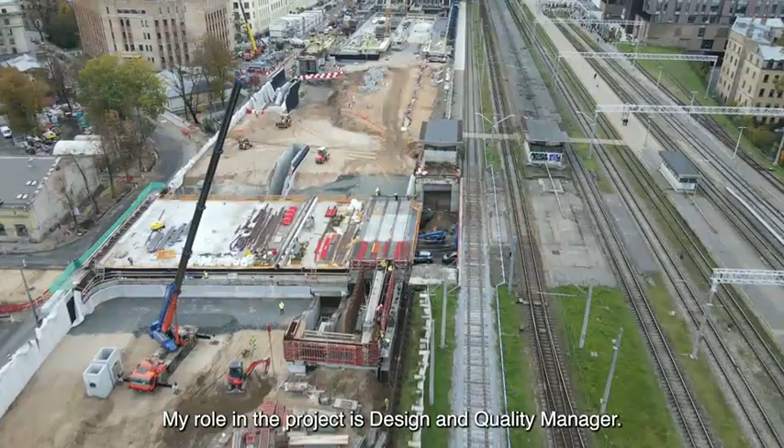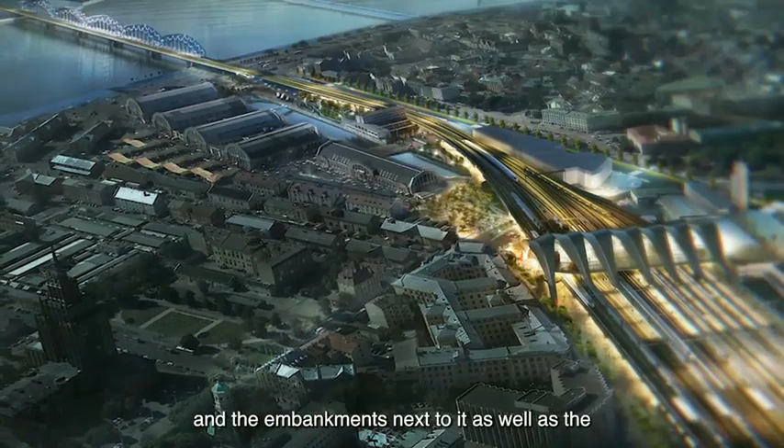I joined the Rail Baltica project as part of the team that won the competitive tender for the design and build for the Riga Central Station project. And now we are designing and building for the last few years the central station in Riga. My role in the project is design and quality manager, so I was in charge of getting the design fully completed, coordinated and approved for the Riga Central Station and the embankments next to it, as well as the bridge over Daugava River. And now I'm in charge of quality control and compliance with the design during the construction period.

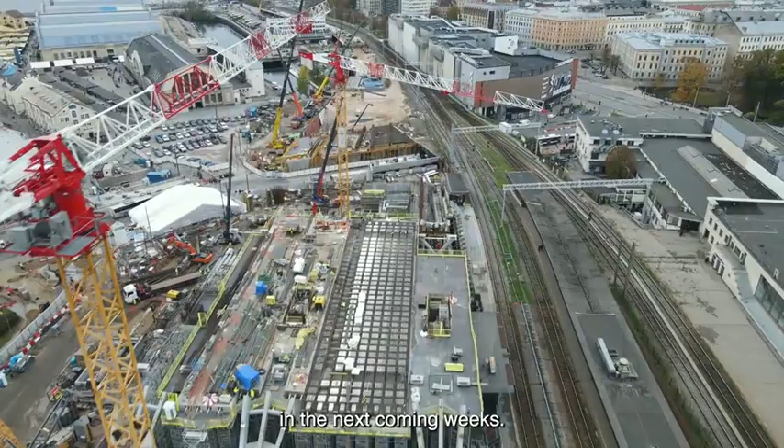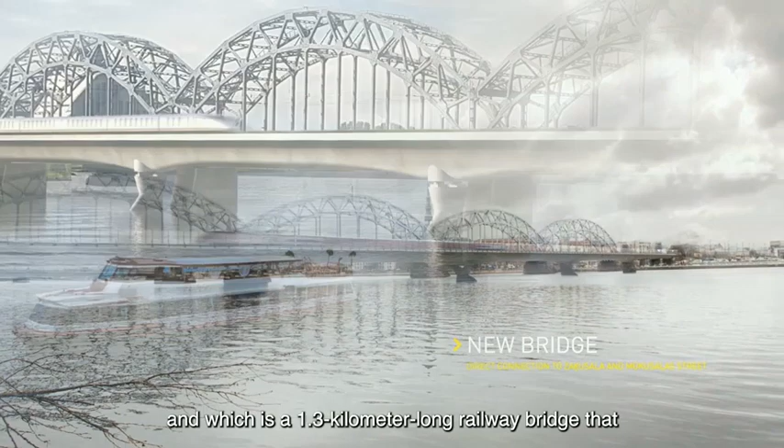For the construction, you can see currently behind me the installation of the feet of the arch of the station, which will be the support structure for the roof and the highest point of the station that will be built in the next coming weeks. So we are starting a new construction phase in the project because we are starting the construction of the bridge over the Daugava River, which is the river going through Riga, and which is a 1.3 kilometer long railway bridge that will be used for Rail Baltica operation.

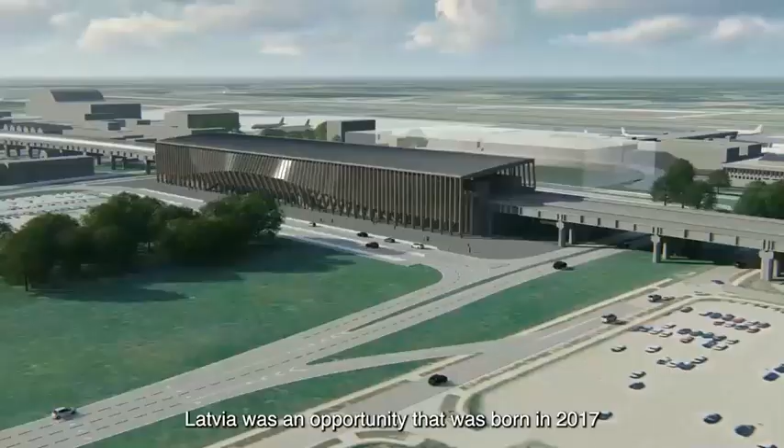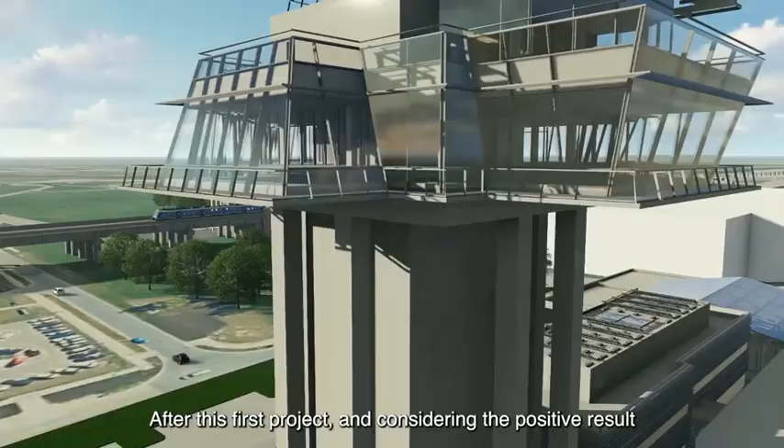I'm Chief of Syntagma Foreign Project Office, and I'm the branch manager of our activities here in Latvia. Latvia was an opportunity that was born in 2017 when our partners in the joint venture invited us into the Rail Baltica railway station at Riga Airport tender. After this first project and considering the positive result of it, we decided to remain and invest again in Latvia. We are now leading company in two other projects here.

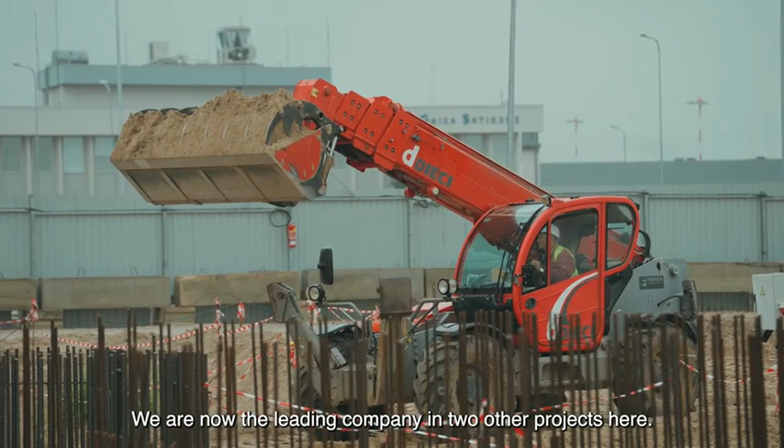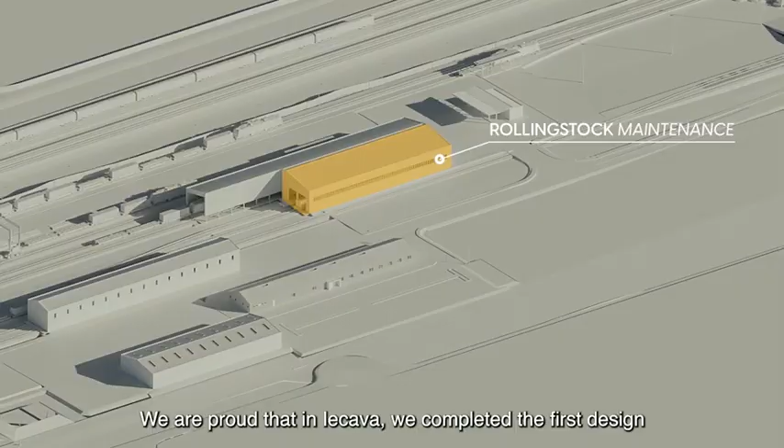The new Rail Baltica intermodal freight terminal in Salaspils and the new infrastructure maintenance facility in Skulte and in Jēkabpils. We are proud that in Iecava we completed the first design, allowing our client to start the first Rail Baltica main line works outside the Riga city.

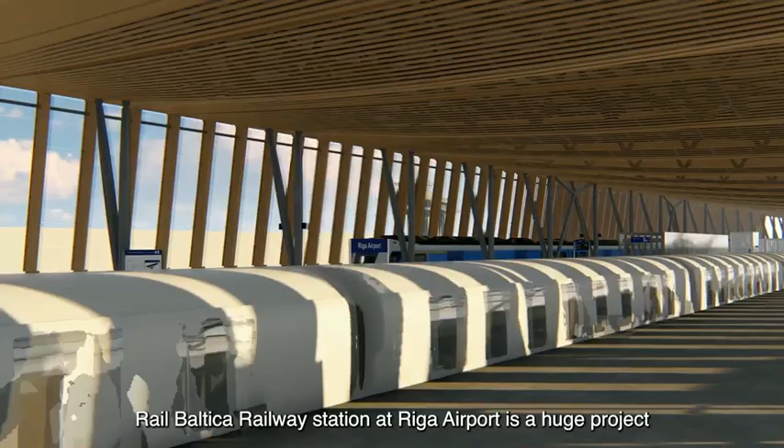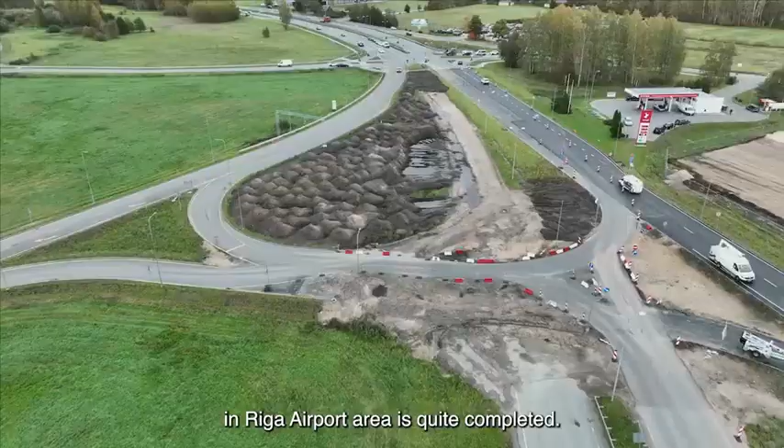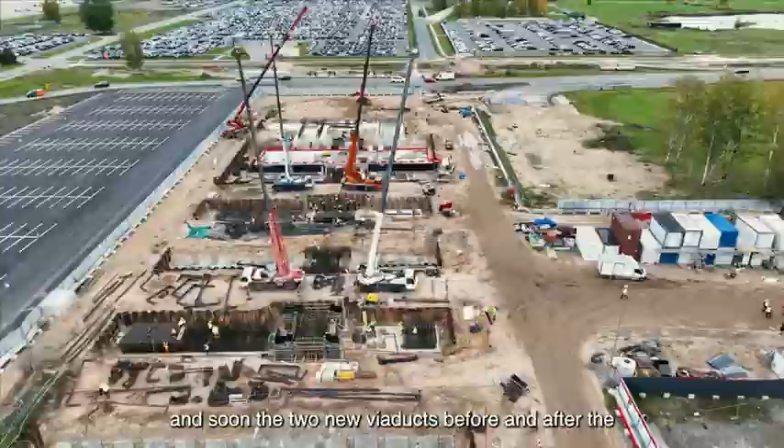Rail Baltica railway station at Riga Airport is a huge project, divided into several stages. At this moment, one of the hardest ones, the relocation of several utility networks and roads here in the Riga Airport area, is quite completed. Also, the foundation piles and pile caps are already done, and soon the two new viaducts before and after the railway station will be realized, allowing the project to be another step closer to completion.

Hello, my name is Gusts Ašmanis. I'm Director of Infrastructure Management Department at Eiropas dzelzceļa līnijas, or as we locally call ourselves, EDZL. We are national implementing body of Rail Baltica project in Latvia, and we are also interim infrastructure manager of Rail Baltica railway section in Latvia.

Today, I will inform you about our activities on which we are focusing and how we are progressing on those activities. Therefore, let me start with a map. It will give an overview of infrastructure we are developing. We are in the middle of Baltics, and that explains that it's also middle section of Rail Baltica railway line. And in this section, we are developing main line of the railway, in this case, railway tracks, as other components like electrification and signaling will be developed by joint venture RB Rail.

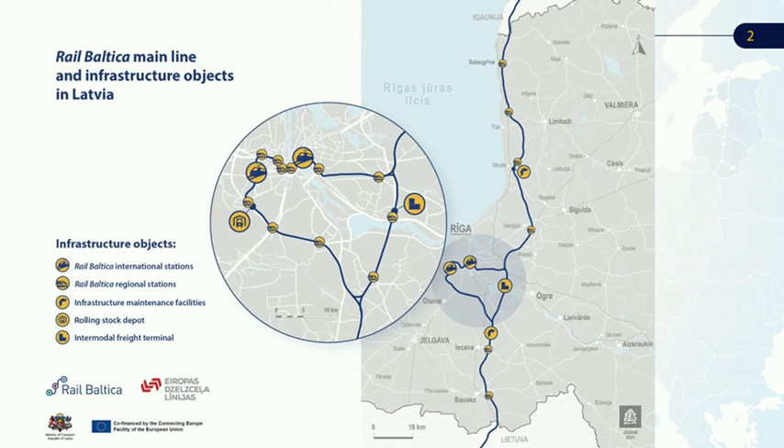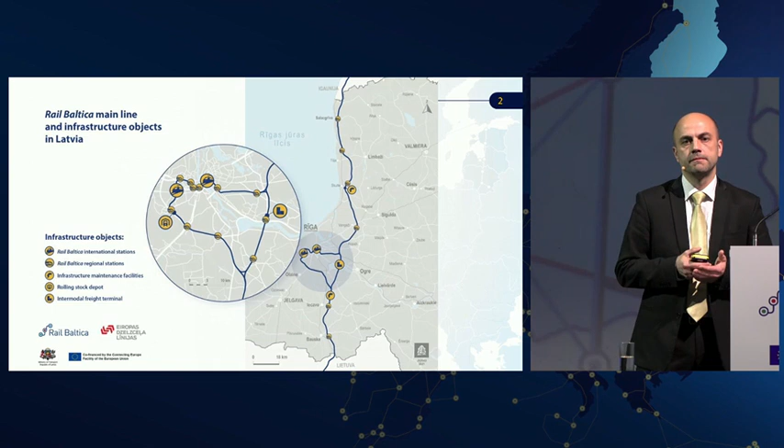And we also develop local facilities like passenger stations, both international and regional stations, freight terminals, infrastructure maintenance facilities, rolling stock depot, and also operational control center. And let me give super brief overview about our progress in those activities. This slide says itself that we are progressing very well in all activities. Of course, we are in different stages in each of them.

The most further development and progress is in our activities regarding stations. International stations are in construction phase, and this is obviously because we started this activity much earlier than other activities due to their complexity. But actually, other activities are also gaining speed and progressing very well. We are on design stage in many of those activities, starting from regional stations, followed by freight terminals and others, like infrastructure maintenance facilities. And few activities are in our pipeline.

We hope we will be able to announce soon procurement regarding those works, like development of rolling stock maintenance depot and design for it, like design for cargo terminal near to Riga International Airport. In addition, as I said, we are responsible for infrastructure management functions until the final infrastructure manager will be appointed. Therefore, what we are doing right now, we develop infrastructure management model and also work together with our colleagues in Baltics and with joint venture RB Rail in order to prepare a readiness plan for infrastructure management functions.

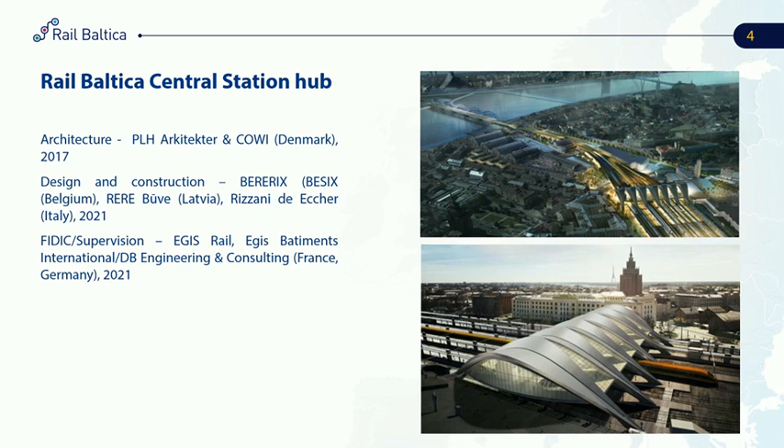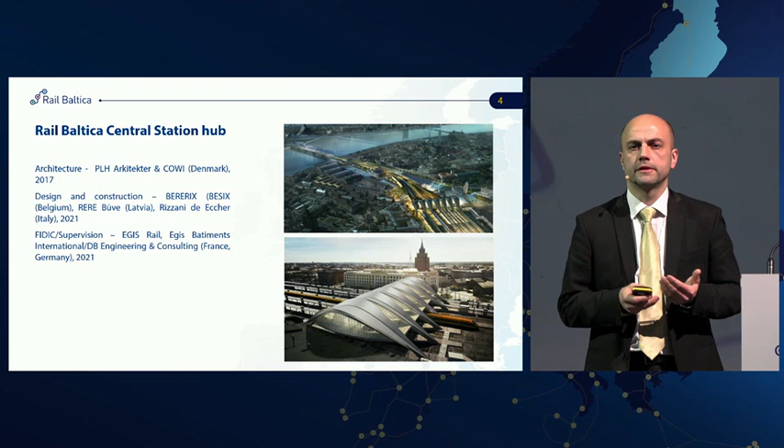development of infrastructure. In this activity, we work together with many international partners from different countries, starting from design and followed by construction works and supervision of construction, and this is also involvement of our local partners. Therefore, it is important synergy between partners from different countries. In addition, I have to mention the importance of Riga Central Station for the industry, for the transport industry.

This project is brownfield. It means that the station is there, is operating, and we are developing additional infrastructure and we will reconstruct some existing infrastructure elements. But what we will bring with Rail Baltica is additional passengers, and we are not developing only European standard gauge and connection to Europe through that. We are developing new connectivity with regional bus, as a bus terminal also will be located there.

That means that Riga Central Station in the future will definitely be the biggest passenger hub in the Baltic states. We still discuss with colleagues what could be the number of passengers, and it depends how we will be able to use the capacity. If we use maximum capacity, then we can achieve more than 40 million passengers per year in this station.

It means a huge number and significance, and it's also a significant connectivity point for the whole region and for the local community, because new connections will be available by train, new connections will be available by bus, and this will be a significant improvement from the existing situation. Therefore, it is a super important activity for us, for the whole project and for the transport industry.

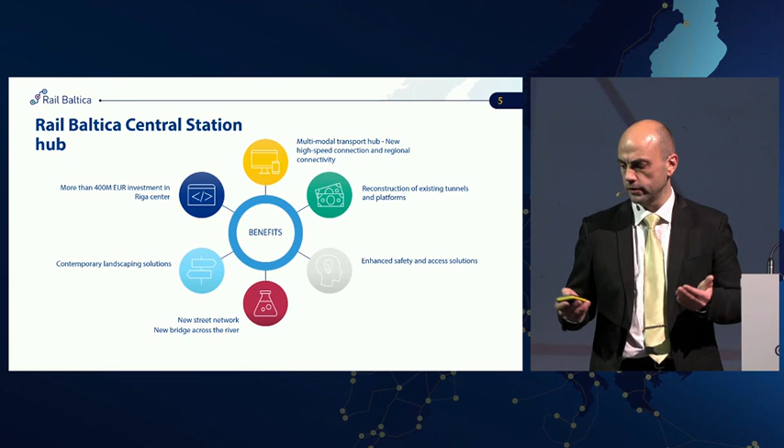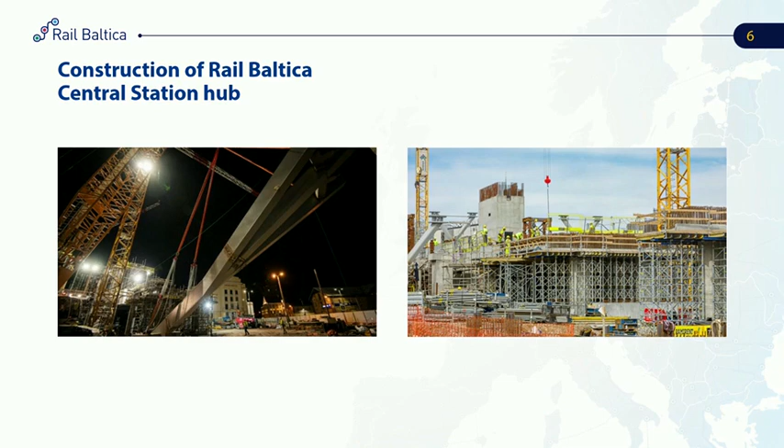Now you can see a few pictures from construction works, and this is also an additional message that this station will bring, and actually already is changing the landscape, and this is therefore important also for the local area, for Riga city, and will improve not only the station but the whole surrounding area.

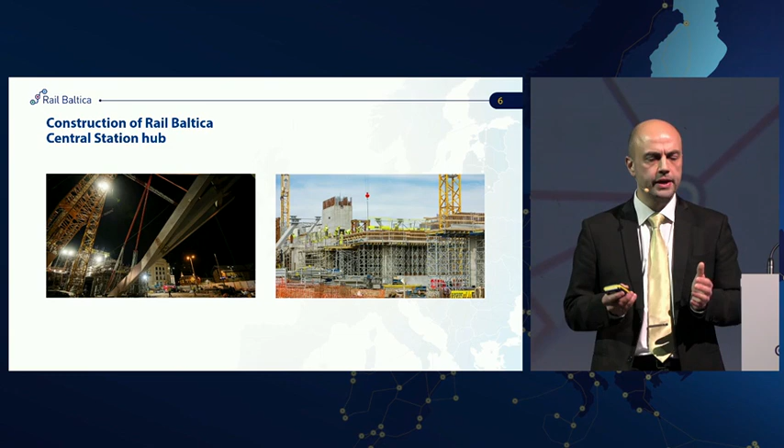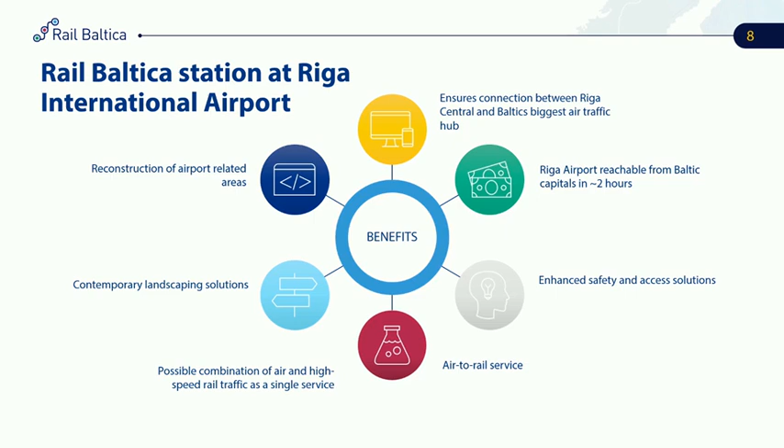Air-to-rail connection will be possible after construction works and start of operations. Such service is not available here, and this is what we aim to achieve. And although we don't have a service provider yet, our goal is to achieve a fully integrated air-to-rail service. That means that passengers together with their luggage will be able to check in at the station, and this is what we are focusing on.

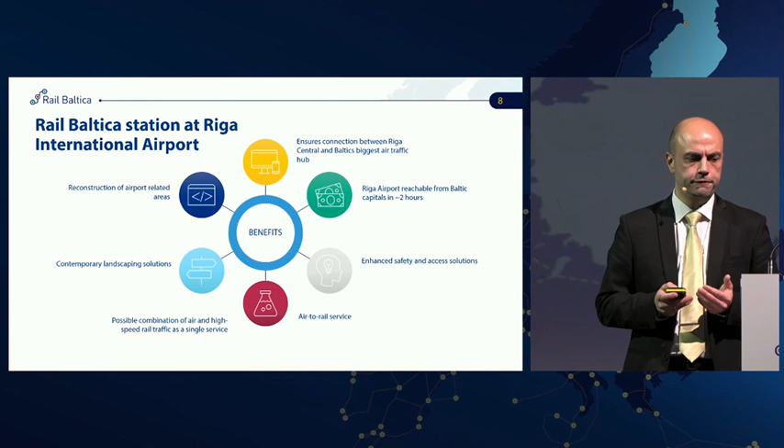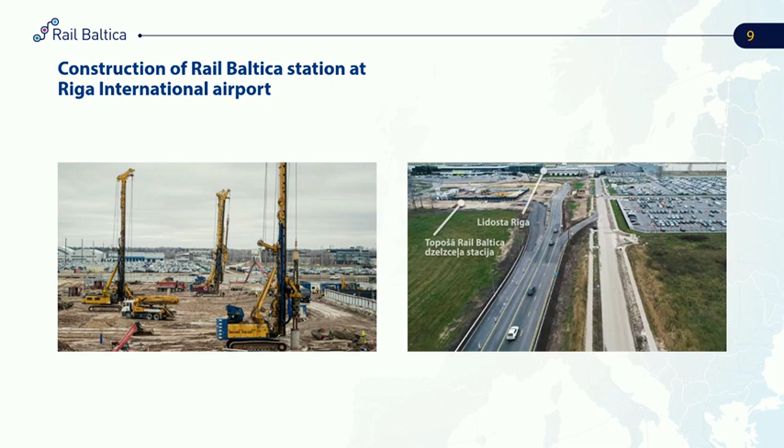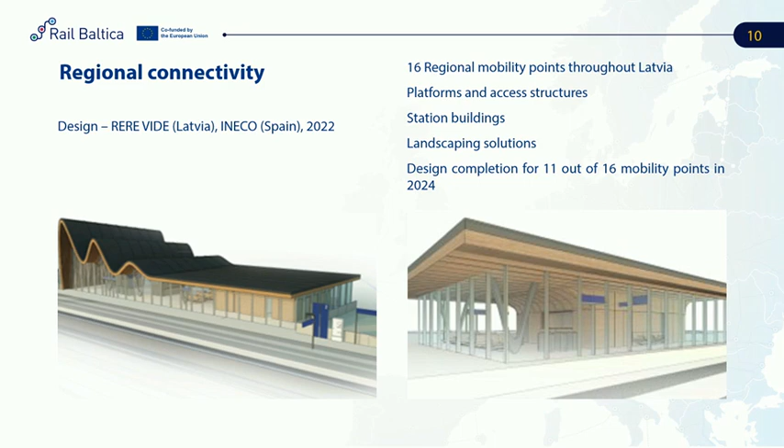This activity is at the design stage, as I said, because it was started later, and actually this activity arrived later in the project as well. But despite that, we are progressing very well with this. We are at the design stage. We aim to complete the design of regional stations during the next year, if not for all of them, then at least for most of the regional stations in Latvia.

And again, the benefit from regional stations is that they will bring new connectivity. It will attract a significant number of passengers for the Rail Baltica line, for the transport industry, for the public transport industry. It will create an opportunity to get much faster to regional points in Latvia, like Salacgrīva and Bauska, than by any transport mode today.

It will create an opportunity to create better multimodal public transport with bus and rail connections. And we believe that in the long term it will also develop regions, as history shows that urbanization processes develop around station areas.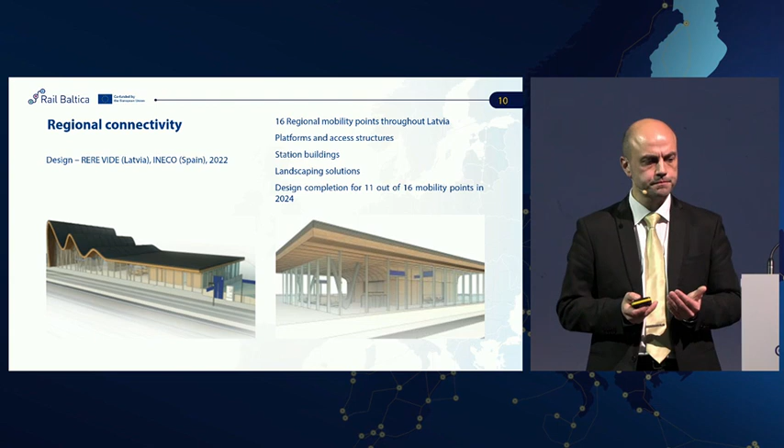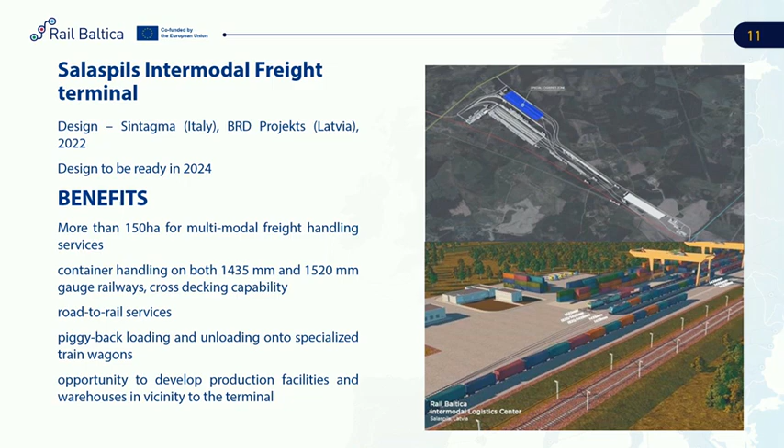Now let me switch from passenger stations to cargo terminals, and let me inform about Salaspils freight terminal. This is an important terminal from many perspectives, but the most important is that it will provide multimodality for cargo deliveries. First of all, multimodality for road to rail, and then of course between two types of rail, starting from the existing railway gauge and its connection with European standard gauge in this terminal.

We will be able to handle cargoes in this terminal between these two types of railways, and also hand over to road transport. And we aim to handle here containers, bulk cargo, as well as provide piggyback roller services. And this is an important and significant improvement for the whole industry.

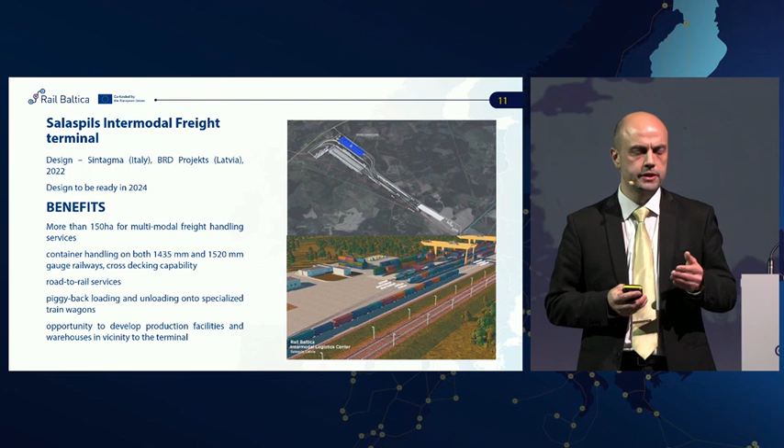And that's not all. Actually, in this area, we aim to develop additional services like container parking or container repairs, like warehouses. So many important services will be available here in this territory in the future, and this is what we are working on.

And now let me switch to the infrastructure maintenance, and inform a bit about infrastructure maintenance facilities. Currently, we are working on both of them and completed the design stage for one of them. We have a building permit for the infrastructure maintenance facility in Iecava, and we hope to get and complete design for the infrastructure maintenance facility in Skulte quite soon.

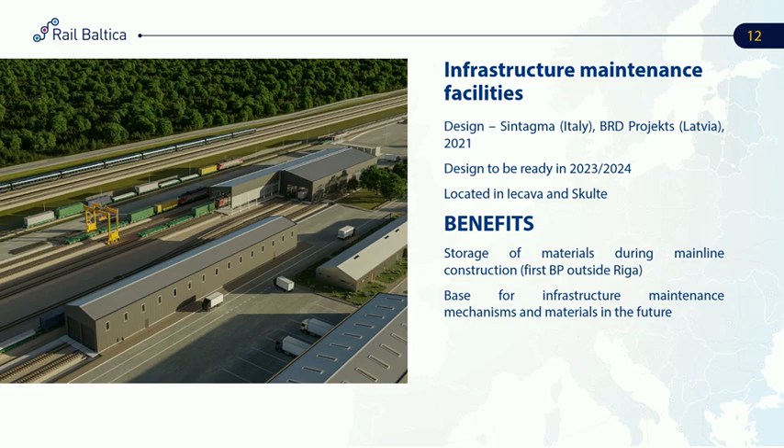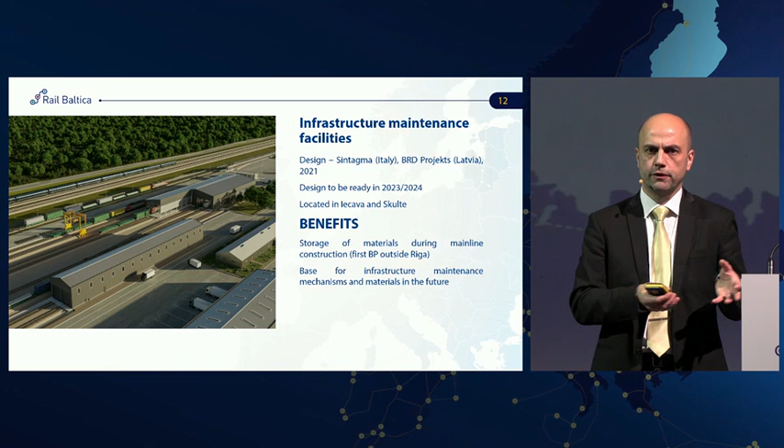Why is this activity so important? First of all, for construction works. For construction works, it will be a base for construction materials. But then, after construction works are completed, it will serve its main purpose, as an infrastructure maintenance facility, where infrastructure maintenance materials, equipment, and special rolling stock are located. Special rolling stock like fire and rescue train and others. And therefore we develop this area with respective functionality and respective premises for that functionality.

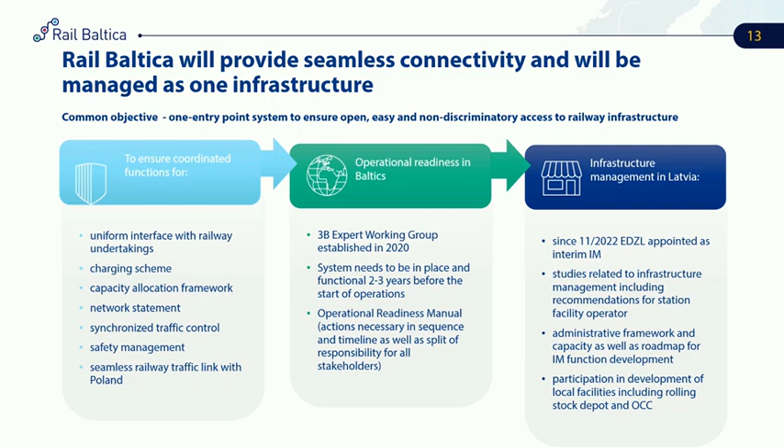And the last but not least slide from me is about infrastructure management. This is my direct responsibility in the Rail Baltica project and in the Latvia section. I have to admit that currently we don't have the final decisions yet about infrastructure management. However, I want to inform that our main goal regarding infrastructure management is to provide seamless connectivity for our future users in the railway, for the railway undertakings, for passengers and other infrastructure users.

In order to achieve that, we have established an expert group, and we work closely together with our colleagues in Lithuania, in Estonia. We know that despite the decision about infrastructure management, we need to develop a model in which we provide non-discriminatory access to railway infrastructure, and therefore we work on common principles regarding traffic management, safety management, access charging, and capacity allocation.

And what we have done so far, we have developed an operational readiness manual, and we did it together with colleagues I mentioned from Estonia and Lithuania, entities responsible for infrastructure management, as well as together with the joint venture RB Rail. Why this manual is so important is, first of all, for infrastructure managers to understand what needs to be done in order to start operations from the first day when the construction works are completed.

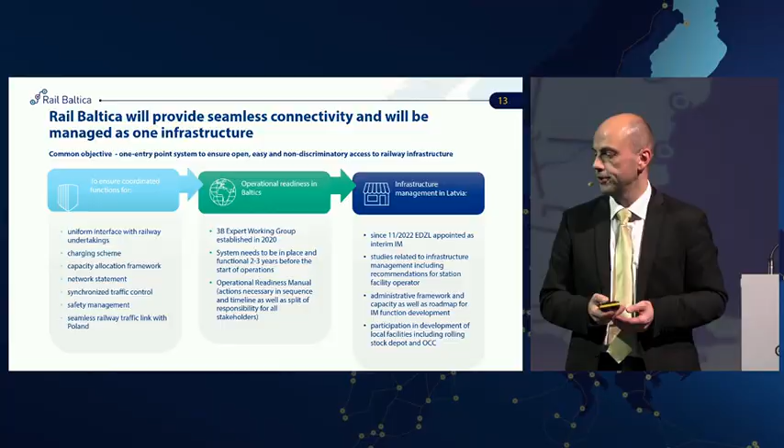Thank you, Gust. It's actually great to see you finish on the same idea that the Minister of Transport of Latvia mentioned, that operational readiness is actually key to the success of the overall project. So great to see that everyone is cooperating.

We have received a few questions on Slido that are particularly addressed to Latvia, and we do have time to go through them all. Okay. So, in Latvia, construction of Rail Baltica is happening in Riga center, making the building sites easy to follow. What is next? What are the next visible construction works planned?

Yeah, thank you for the question. And let me start with activities I just mentioned. Infrastructure maintenance facilities in Iecava, this is outside Riga.

Is one of them where we already have a building permit, and construction works will start as soon as we sign the construction agreement. Then additional activities I have to mention are still in the center of Riga. Actually, the bridge over the Daugava River is ready to launch construction works. It's already started, but maybe not visible yet. Construction works will be visible quite soon, somewhere in November or December.